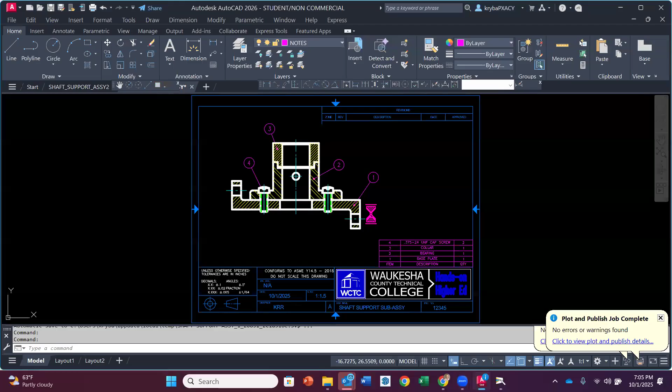So the first one here is going to be the vise screw. I'm going to ignore this one.

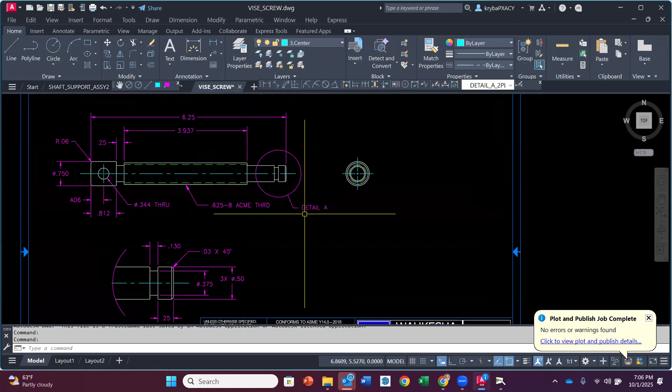I do want to show you something here because you'll notice on the end, I thought this would be a great opportunity to do what we call a detail of just a small portion. What we want to do is blow it up so that we can dimension it. You'll draw this one-to-one, and then you'll notice I added this at the end here. Could you fit all these dimensions in? Maybe, but it would be really close up in this view, as you can maybe see.

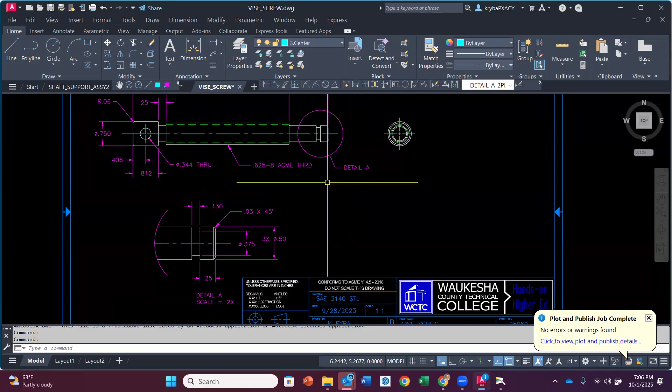So what the detail does, it makes an area larger so we can add the dimensions and have the room to see what we need to do. So how do we do this? I'll show you the process to go through here.

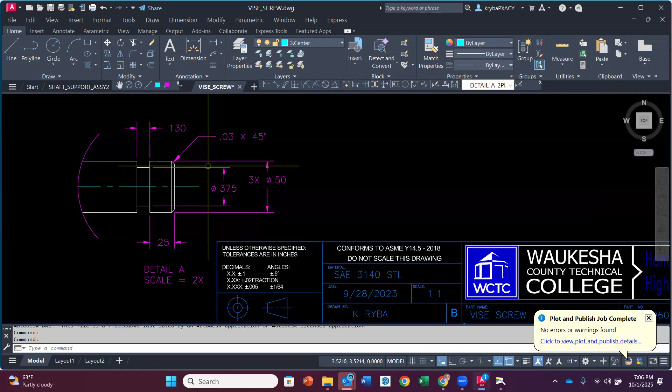So we want this to be, you'll notice that it says detail A here, and if I go underneath, this is a scale of 2 times, so this is 2 times larger than what the rest of the drawing is.

So to make that view, I am going to copy this whole circle, the whole area right here. You'll notice that when I selected this, it didn't copy this line and this line because it wasn't all in there, and the center line, so I want to grab all 3 of those so I have everything, even though it extends outside of that circle.

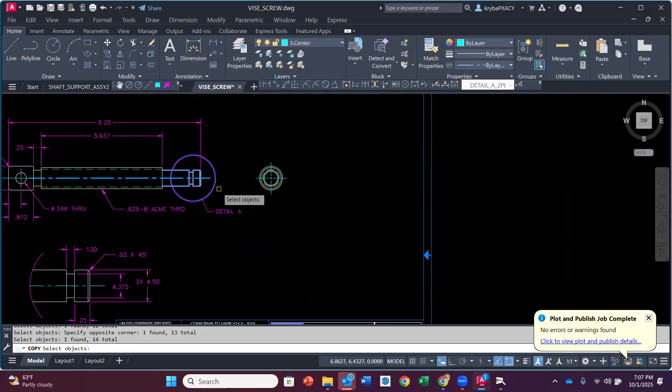Then I'm simply going to hit enter, and then from a base point, I'm going to move this to a location that I want it to be.

Now what I'm going to do is I am going to trim away the parts of the line that I don't need. And then I'm going to grab this. I can't trim the center line for some reason, and I'll pull it back. Okay, there we go, so now I've got that there.

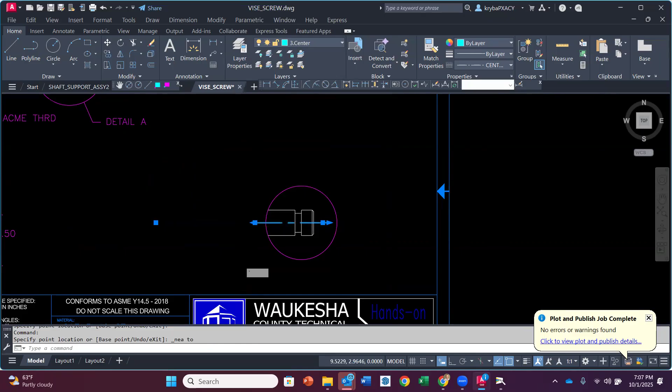And you'll notice that I didn't put the full circle around it, but that's okay. Now what I'm going to do is I'm going to scale this. I'm going to do SCALE, just scale, or there is a scale command right here in the middle of the modify box.

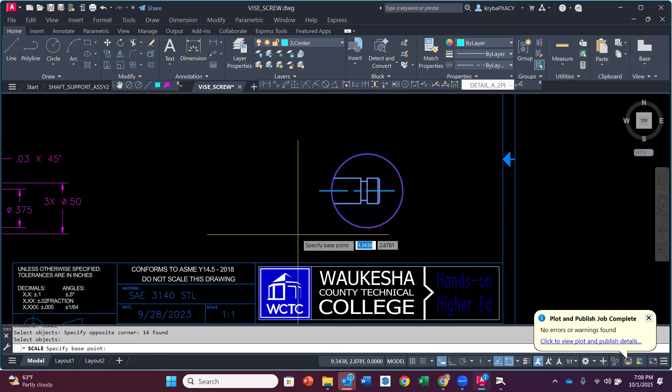So scale, enter, and now I'm going to select all of this, and I am simply going to put my base point here, and I'm going to say 2, 2 times. So now it's bigger.

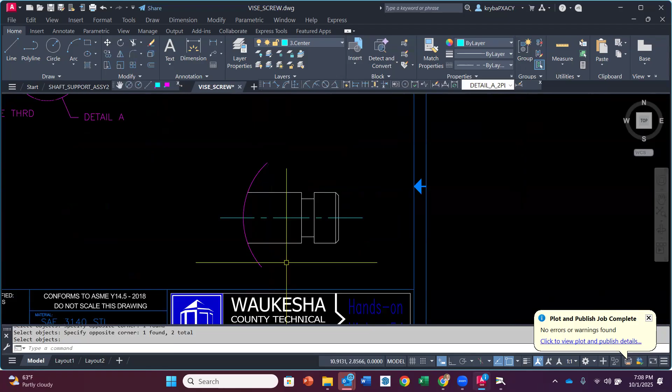You can then trim off. Actually, I've got to draw lines to trim to first. So I'm going to draw a line here and a line here, and I'm going to trim this. I'm going to get rid of that and that just to kind of get that. And then you're going to add your detail A label, blah, blah, blah.

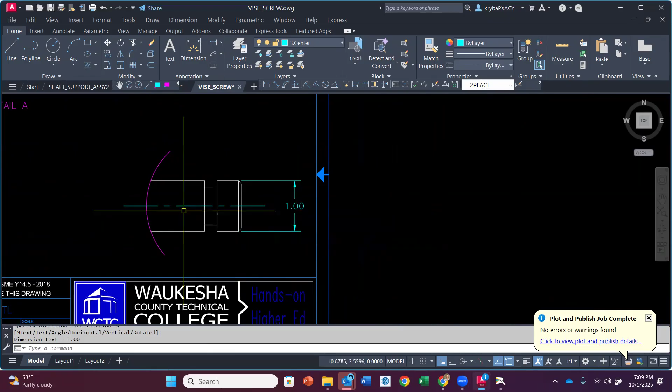Now to dimension this, if I would dimension this right now to a 2-place decimal, like the rest of the drawing was, our normal 2-place decimal, I am going to notice that it's going to be double the dimension. I should really put this on the dimension layer. And that's a problem, because all I want to do is show that larger. So instead of it being a half inch, like it is drawn up here, it's showing as 1 inch.

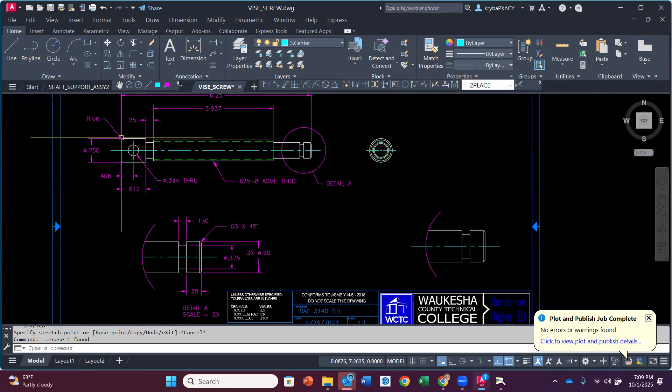So what do I do? I'm going to delete this. I need to change my dimension scheme for just the detail. So what you're going to do is you're going to do your normal 2 and 3 place decimals up here, and then when you're ready to dimension this, you are going to go to your dimension manager.

And you're going to create a new style. Now all of these dimensions are 2-place, so I'm going to go 2-place, not modify. I don't want to modify, I want to create new. And what we're going to do is we're going to call this detail A 2-place.

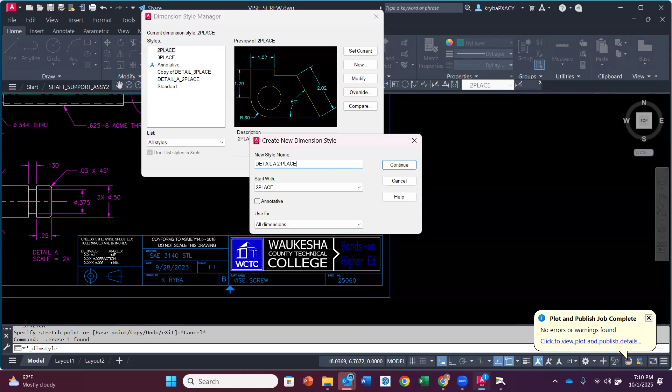Detail A, 2-place. Continue, now my dialog box comes up. My fit is all going to remain the same. Okay, this is still 1-to-1, but I'm going to go to

my primary units, okay? Right here in the middle, there is a measurement scale, okay? Right now it's set 1 to 1. We've never changed this before, but because we made our drawing 2 times larger, my measurement scale needs to be

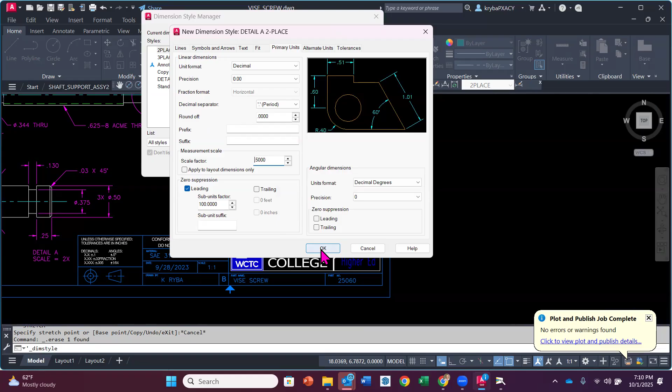0.5, 0.5. Now I'm going to say, okay, everything else remains the same. So again, that modify is on the primary units, not fit. Primary units, and it's going to be measurement scale, and it's going to be 0.5, okay?

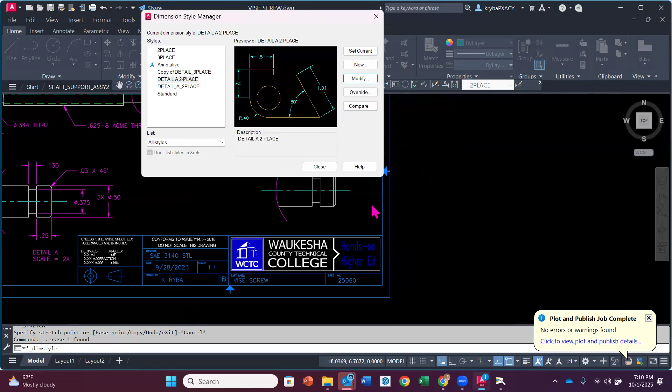So I said okay, set current, okay, and you're going to notice that here it changed to detail A 2 place, because detail A is 2 times. So now when I dimension, point, it's 0.5, okay? And then everything else will be half, so that it's the right dimensions for the drawing.

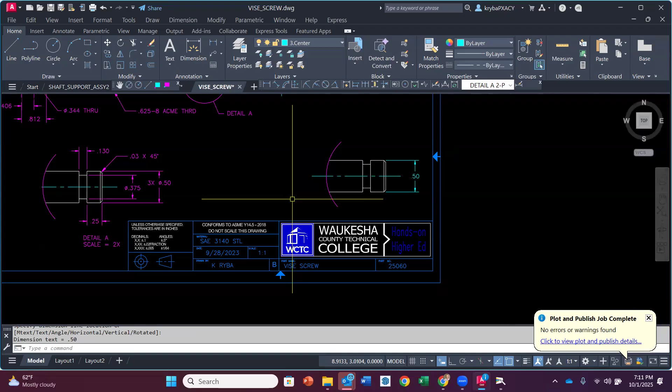Does that make sense to everybody? So that's something that is new. The detail is 2 times larger, but now we have to change that measurement scale to 0.5, okay? All right, so everything else on here I think is okay. Set screw, why is diameter not specific? I'll go back to that, Dominic. Everything else here I think is pretty straightforward. So that's the vise screw.

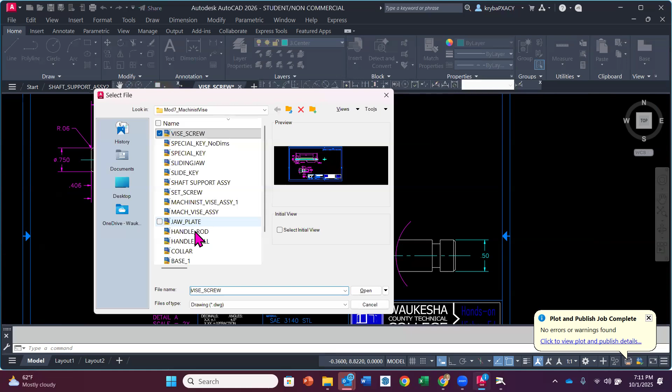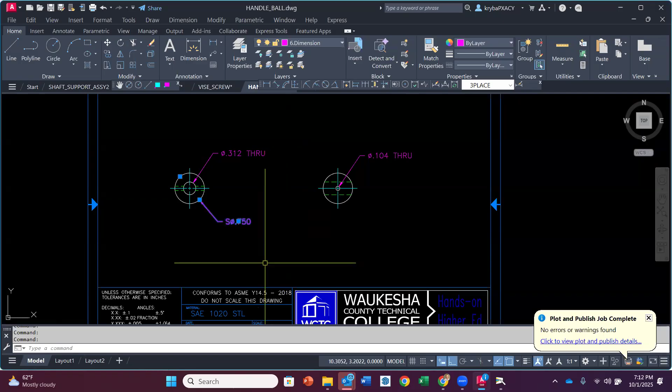So let's look at the handle ball. Okay, here, probably the only thing that we haven't seen, this is just a spherical, it's a ball, okay? So when we specify the outside diameter, we have to put an S in front of the diameter because that means it's a spherical diameter. It's not like a cylinder. Does that make sense? Okay, that's the only thing different for this one.

And then if I open up and I look at the collar, okay, this one I did a section through, so we could dimension the lengths that we see here, and then depth of that slot, so we could see it's 0.125. It's called out in the depth of the slot here, but then this has to be a reference dimension, so parentheses around that dimension. And then the call out here as well.

Is this what you were referring to, Dominic, on the set screw where you don't have an outside diameter here? Is that what you're referring to? Because this is an external thread, and we point to that thread and we call it out as the thread call out, not as the major diameter. I can go back to that otherwise too, but yeah, you'll notice that we don't show an outside diameter across the outside diameter. We call it out as a note for, in this case, 13/16-20.

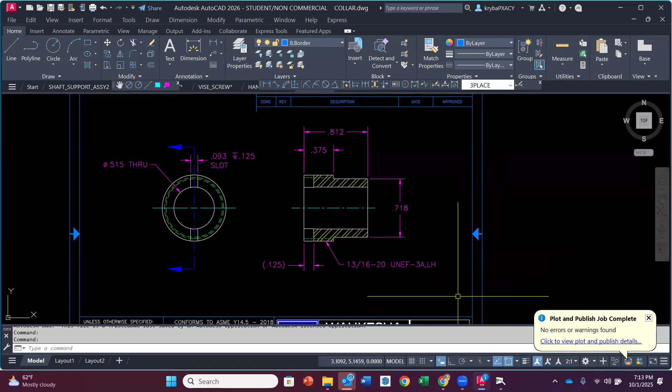Okay, we'll look at that one specifically. All right, so that one's that. And then the very last one, this one's your challenge part in this second assignment. This is the base. Here again, we needed to add a little section view so that we could dimension to what otherwise would be hidden features. So we've got, you'll notice that we've got a top view, front view, right side view, and then over here we have the section view, okay?

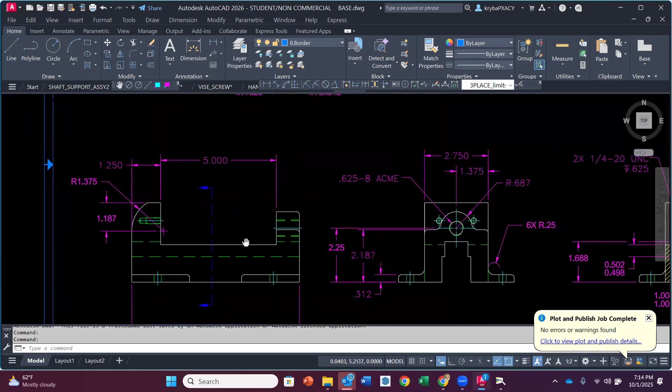So as I look, I'm just kind of peeking around. I don't see anything out of the ordinary that we haven't talked about. I think everything else you can handle.

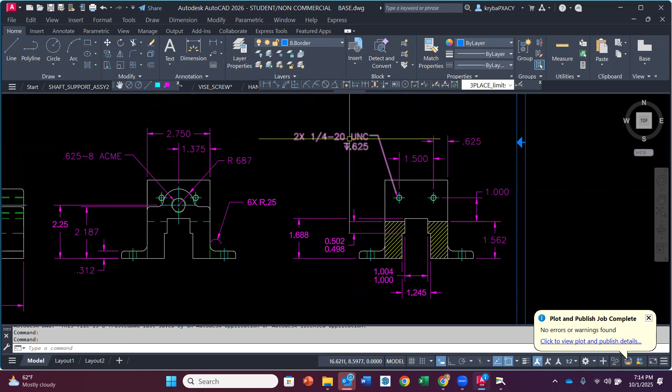Why am I dimensioning in this view? Maybe it's because it's to the true size and shape or not to a hidden feature, those types of things. Okay, so kind of take those notes down and then really using the AutoCAD, figuring out how do I put limit dimensions in here and making sure that you're calling out the threads appropriately and representing them. So the guides here are so that you don't have to have like 8,000 things you're thinking about all at once. This way you can kind of focus. All right, so hopefully that gives you some good direction on those drawings. But if you still have questions as you're working, I'm very happy to help you out.